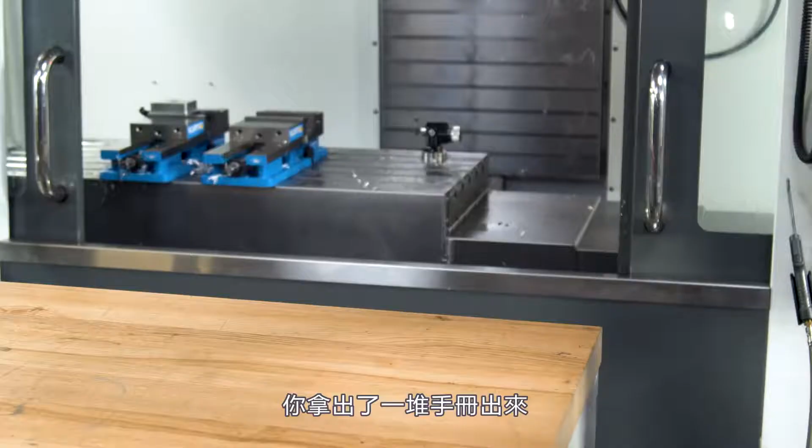So we want to program a CNC mill. So you pull out the manual and you start reading. That is a lot of code. Now those aren't really our manuals, this guy is. But still, there are enough codes in here to choke a horse.

So where do we start? Inside this envelope are the top secret 9 lines of code that every CNC programmer knows, the 9 lines of code that you need to fully understand before you write your first program. So stick around as we look inside.

you have been preparing to be a CNC programmer your entire life. You might just not know it. Our moms, our teachers, and even the Cookie Monster started off teaching us how to count cookies before we could ride a bike. And by kindergarten or first grade, we took those numbers and laid them across a number line from 0 to 10, but all on a single axis.

And by 5th grade, they added another axis, and we started plotting pairs in both an X and a Y in a single quadrant. And then by 6th grade, our minds were blown when they started adding in negative values, negative numbers. We now had both positive and negative X values, positive and negative Y values, and we were taught to plot coordinate pairs in all 4 quadrants.

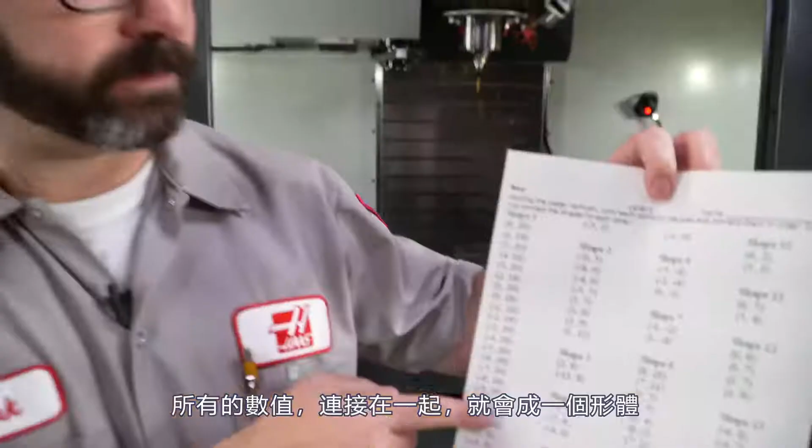Now with these templates, they've made things incredibly easy for us. All the lines that are connected are called a shape. Shape 1, shape 2, shape 3. And they gave us very specific instructions. We can plot each point on the axes and connect them in order. Do not connect the shapes to each other.

This makes sense. We grab our pen or pencil, we're going to draw the shape. When done, we pull our pen off the paper, move to the next shape, come back down the paper, continue with that second contour. Now these templates are everywhere on the internet. You can find tons of them just by Googling graphing coordinate pairs, or you can create your own.

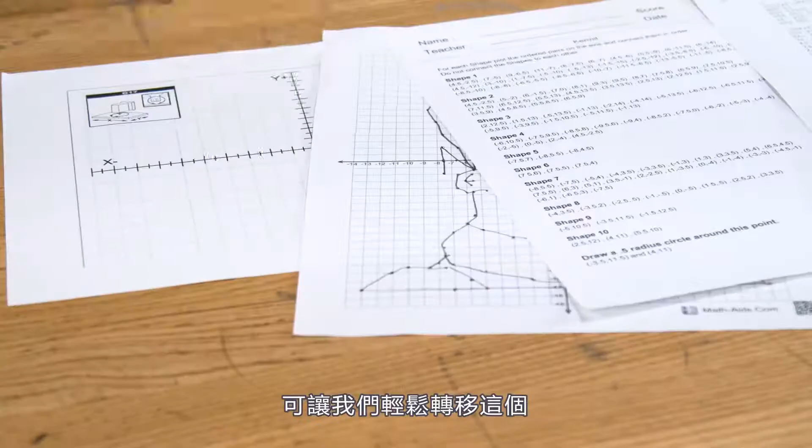So having mastered the art of middle school graphing of coordinate pairs, we can prepare to move from this to machining on actual machines. But we need some codes. Tyler, the envelope please.

Perfect. These are what I think are the 9 most basic lines of code that every CNC programmer knows. Before you can program this, you need to understand what each and every one of these lines does.

This is where we start. Now, don't worry about writing all this down. We'll link to this document in the description of the video.

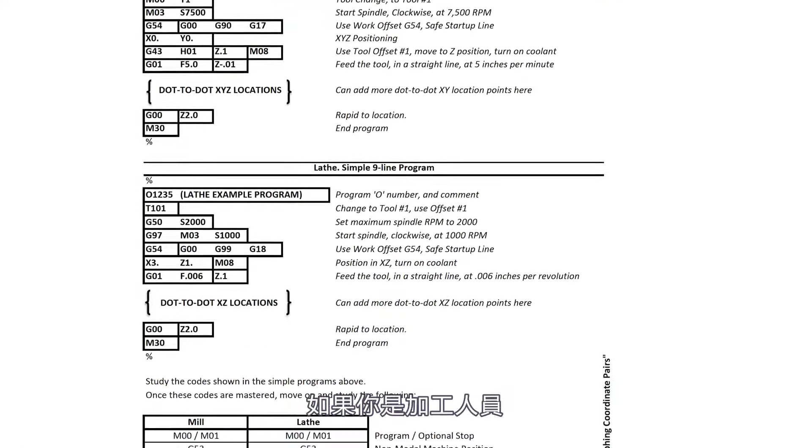Now, these look like pretty simple codes. You probably already know them if you're already a programmer. But the bonus content that you'll download is kind of an expanded version. It'll have these basic 9 lines of code for mill. In the bonus content, we'll add the 9 lines for lathe, and we'll also give you what to study next, the more advanced codes. Because just about every part that you will ever program can be made using just the codes on this sheet. A really, really good resource.

We've boiled down that entire manual into a single page for you.

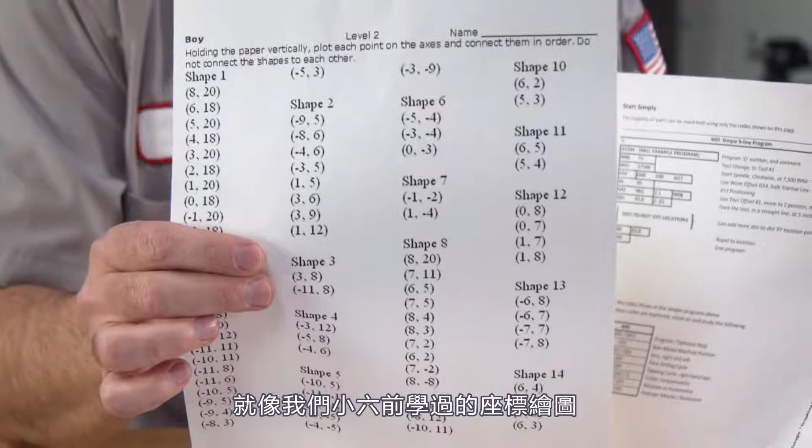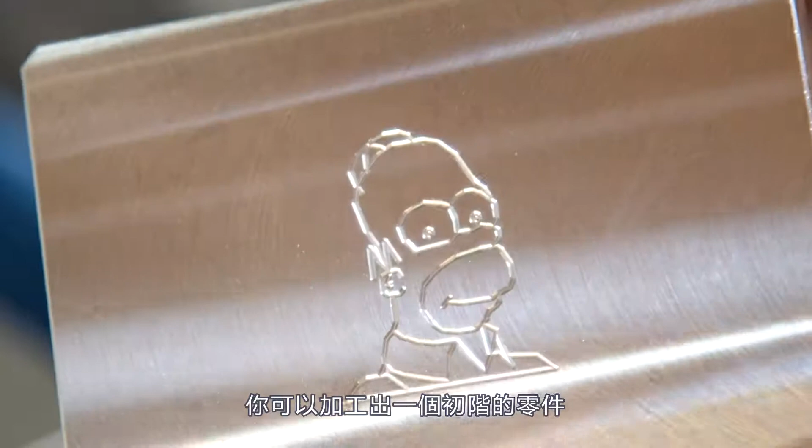Now, right in the middle of these 9 lines of code is a little section that's labeled dot-to-dot XYZ locations. Now these are simply the dot-to-dot points that we've all been graphing since 6th grade or earlier. If you put together enough shapes, you've got a CNC program. You can engrave, you can face, you can machine the perimeter of a part just by drawing it on graphing paper, then dropping in those XYZ locations right here in the middle of this program.

Now this is not a how-to video, it's just showing you which codes you need to study first kind of video. But we'll give you a quick definition of each of these right now.

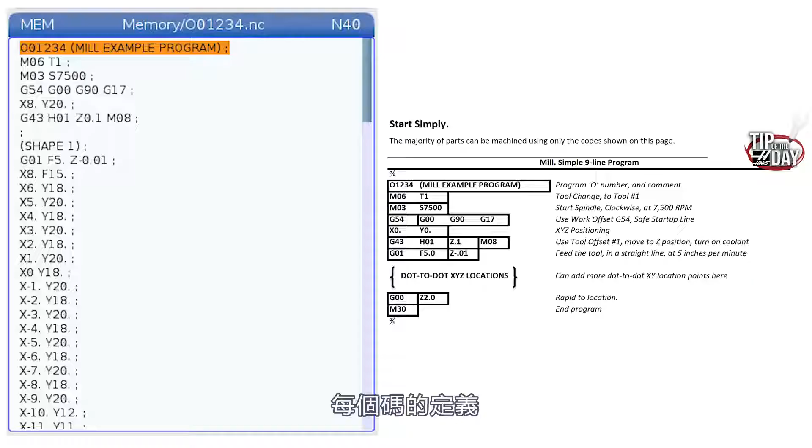This code is bookended by percent signs, both at the top and the bottom of the program. Our legacy controls require this, and the new ones can get away without it, but it's always a good idea just to throw them in.

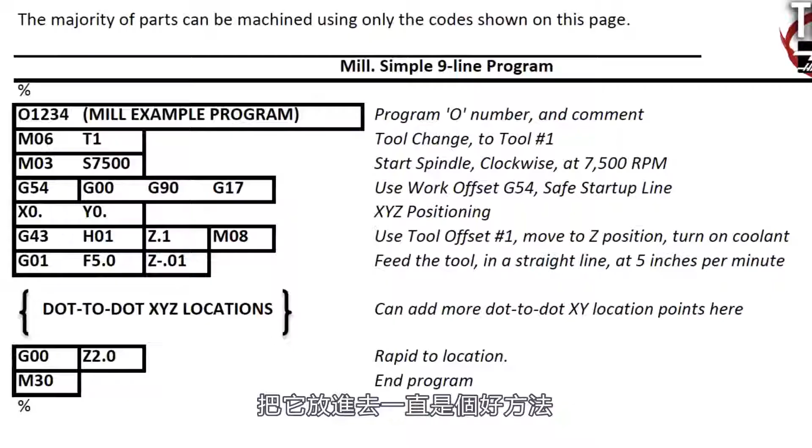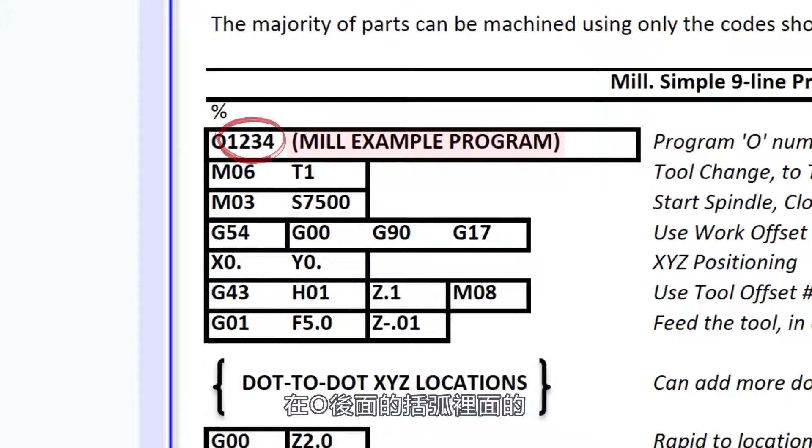Now on our very first line, we have our O number. That is an O, not a 0, followed by a unique number that serves as our program identifier. The text behind, right after our O number, is in parentheses. Text in parentheses is typically ignored by the program. It's just a comment that we leave for the operator.

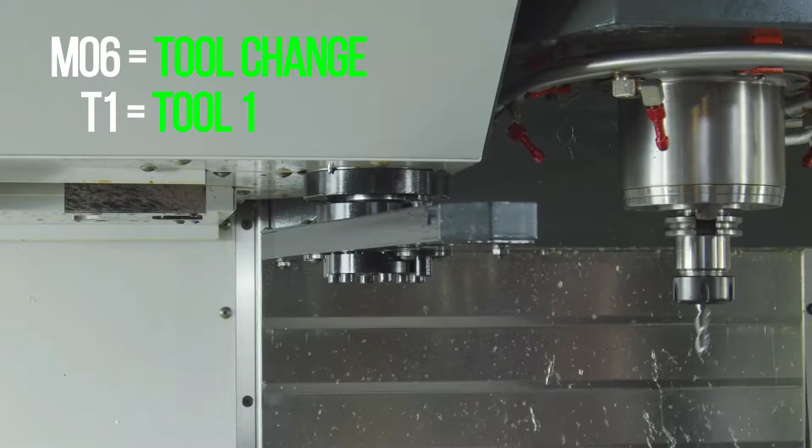Next line, we've got our M6T1. This is our command to put tool number 1 in the spindle.

The next line is M3S7500. That line commands our spindle on and off, much the same way we'd command a cordless drill. An M3 is like pressing the forward button, making our spindle turn clockwise. If we press the reverse button, that's like commanding an M4 on our spindle, making it turn counterclockwise. The S7500 commands 7,500 revolutions per minute, which is just how fast the spindle will move.

Now we're not going to go too far in depth on any of these codes. We're just giving an overview here. The real benefit of this whole video is just showing you which codes you've got to know.

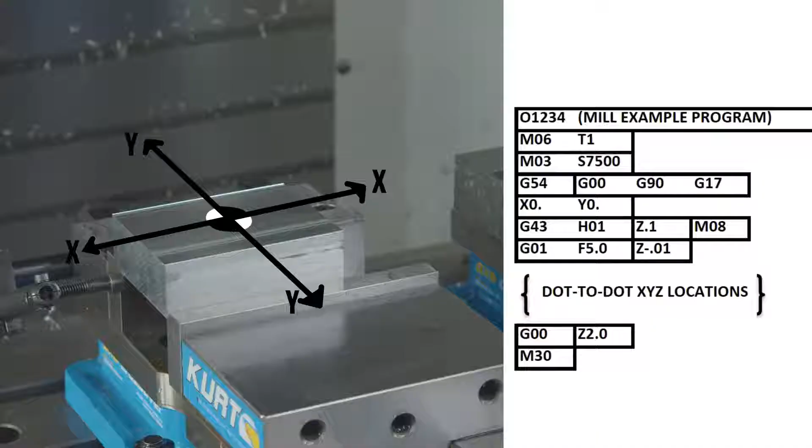G54 is a particular work offset that this part uses. It references the G54 row on our work offset page. We've made whole videos on this, so be sure to check out the links.

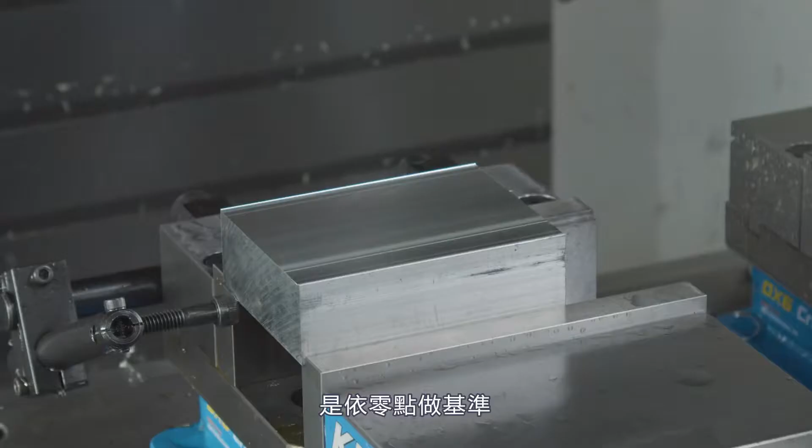G0, G90, G17 - these codes are part of what we call our safe startup line. The G0 commands a rapid move; it's used to go fast, not for cutting. G90 commands absolute mode, which means all of our X, Y, and Z moves are referenced off a single zero point, the same way there was a zero reference point at the center of our graphing paper. G17 is our plane selection, which lets the control know we are machining in the XY plane. Here we have our XY starting position - where our tool will go first, like the first XY position of our first shape that we drew on graphing paper.

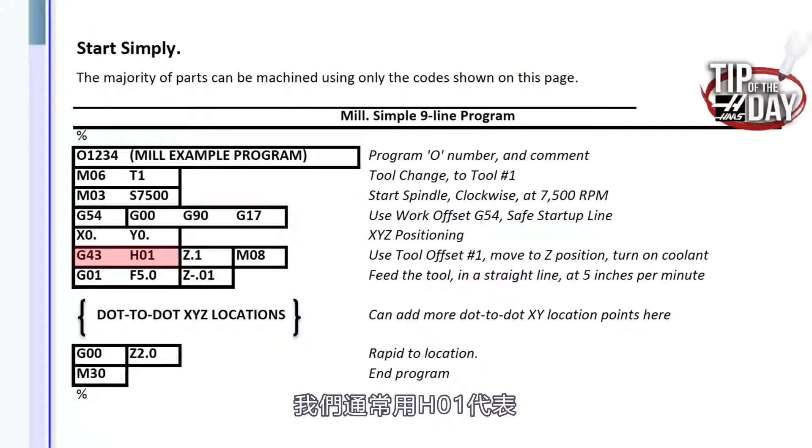G43H1 - these codes work together to let the machine know where our tool is in relationship to our machine and our part, along the Z axis. We usually use H1 if we're using tool 1; they typically match, and H1 references row 1 on the tool offset page. We've also got a Z move on this line - this is the very first Z move of the program. You never, ever want to command a Z move unless you've commanded a G43 and an H that matches your tool number beforehand. Otherwise, the control doesn't know where that tool is in space. We've made entire videos on this, so check them out - check the links in the description.

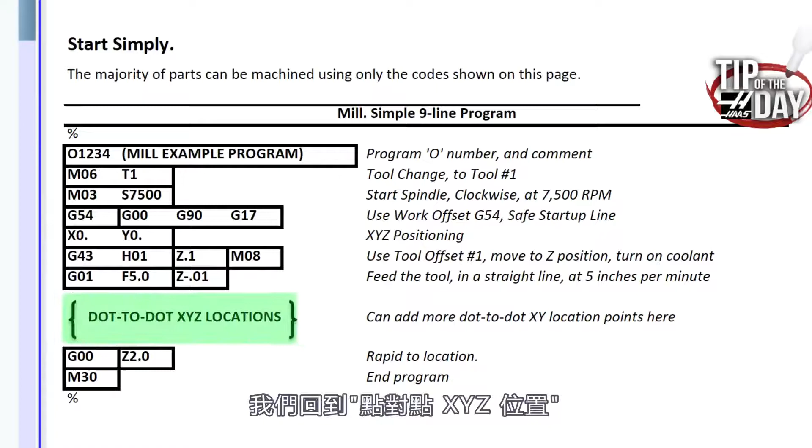M8 turns on our coolant, M9 would turn it off. And now we come to our first feed move, G1, Z minus. G1 just means we want to machine in a line, just like our dot-to-dots. This G1 feed move always requires an F feed rate, which is in inches per minute or millimeters per minute by default on your machine. And we're back to dot-to-dot. Dot-to-dot is where we enter all of our XY locations, the things we want to draw, the shapes. But between each shape, we've got to have a Z move to get us back up and off of the part. So again, G1 is for machining, feeding from point to point.

G0 is for rapiding from spot to spot, between shapes, between cuts. And when we're all done, we wrap it up with G0 off of our part in the Z, and then we end the program with an M30.

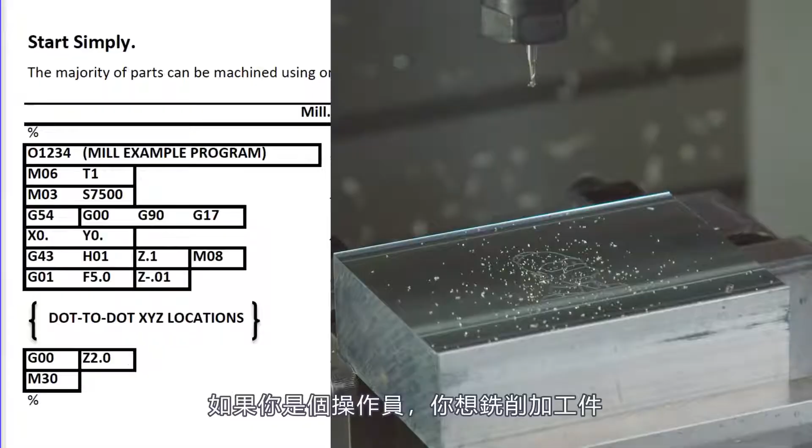If you are an operator and you want to machine, you want to program, start here. Learn these codes first. If you're a student and you want to get ahead in your G-code programming class, start here.

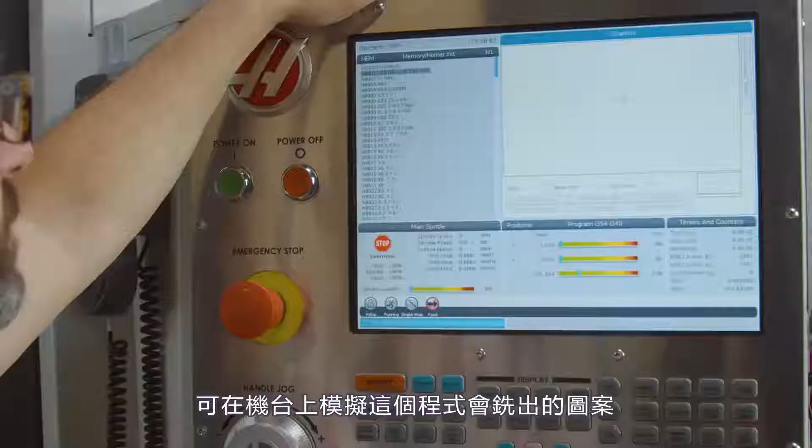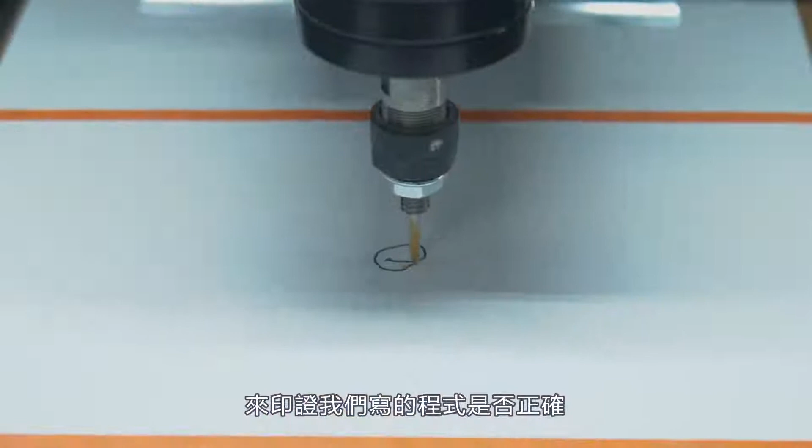Once you've created your code, you'll want to check it. We can run this in graphics on the machine - press the graphics button, set your offsets, let it run. But I'm going to show you our desktop mill right now. This desktop mill typically runs a tiny end mill to machine out parts, but we have a pen attachment in it right now, which allows us to proof out our programs and practice our code writing. It's just perfect for this type of testing.

Well, that is it for this tip of the day, pretty much. Remember, start here - you've got to learn all these codes.